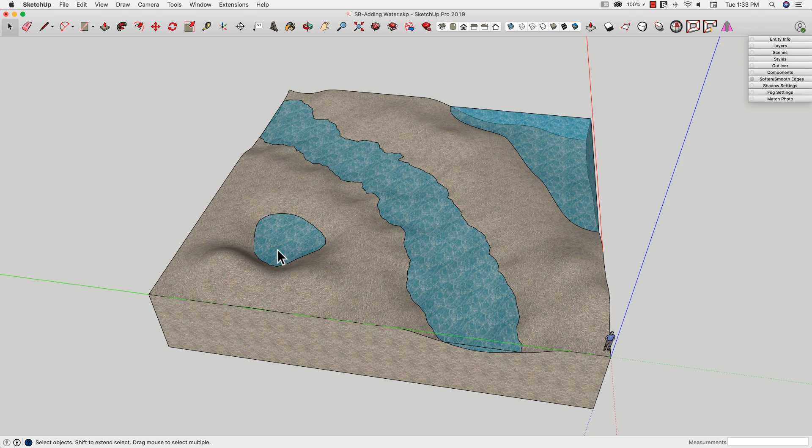Okay, so one of the first things we can do if we want this to pop a little bit more would be to get rid of these lines. If I double click on this surface, it'll select the surface and grab all the adjoining lines. If I hold down Shift, I can click on the surface, turn it off. That will give me just the boundary lines.

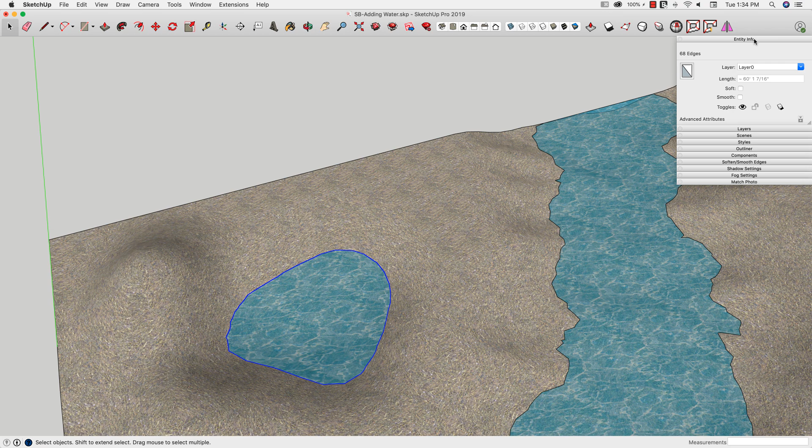Now I can come over here to Entity Info and say Soften and Smooth. What that'll do is give me the water sitting down there without the line around the edge. Not that the line's a bad thing - some people may like that look. It might actually look really good depending on the layout.

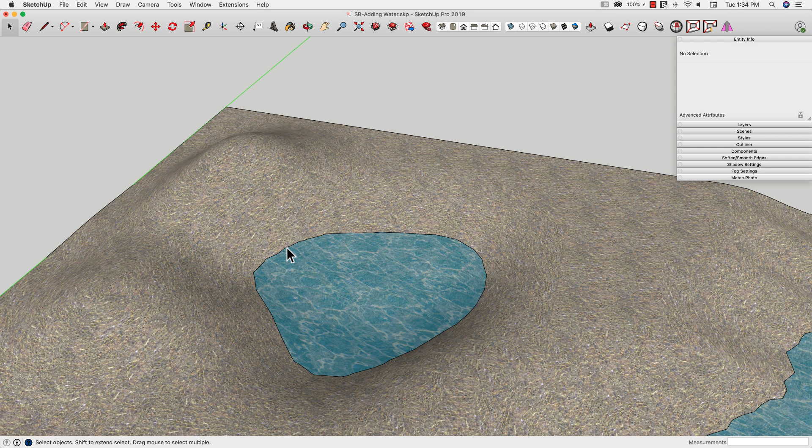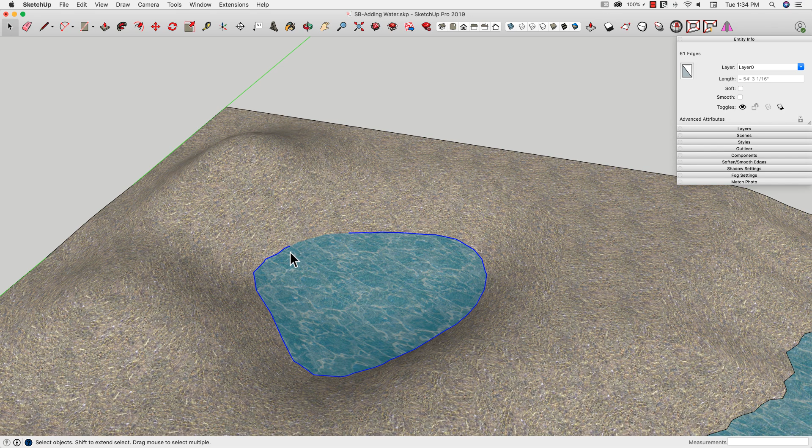But if I want to go for just a little bit more realism, or a little bit more je ne sais quoi - I don't know exactly what that means, I think it means I don't know what - but if I wanted that, I could do that by erasing it. Why don't I just grab my eraser and hold down Option or Control to hide it? I absolutely could do that too, but double clicking and then shift clicking the surface is a quicker way to get all the lines at once and allows me to just toggle invisibility.

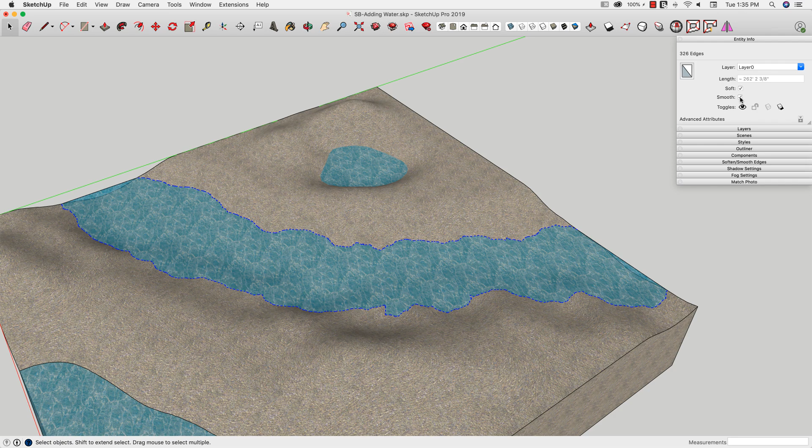I do the same thing on the creek here. The creek's a little bit different because if I do that same trick right now, I'm going to end up losing this line right here, which is kind of a boundary of my model. So I may want to hold down Shift and actually click those edge lines as well, and then soften and smooth there also. That gives me a cool creek, but I still have the hard edge of my design model - I don't know what you'd call a chunk of landscape like this. Probably a landscape chunk, that's probably the technical term.

All right, with our ocean here, this is where the ocean's coming in. I want to do something a little bit bigger than just erasing the boundary line. That's pretty simple. I want to come in and put a couple of ripples, like small waves rolling in, maybe add a little bit of a foamier color, maybe a lighter color right here on the edge, something like that. So what I want to do is take this curving line right here and offset it a few times.

First thing I do is get it selected. Right now it's a whole bunch of small segments, so I could go through the process of grabbing these lines - grab an extra one there, come in here and grab these lines. I could do this, it's a doable thing to do, it's not a bad thing. You do have to, when you get to the edges like this, make sure you turn off the extra pieces.

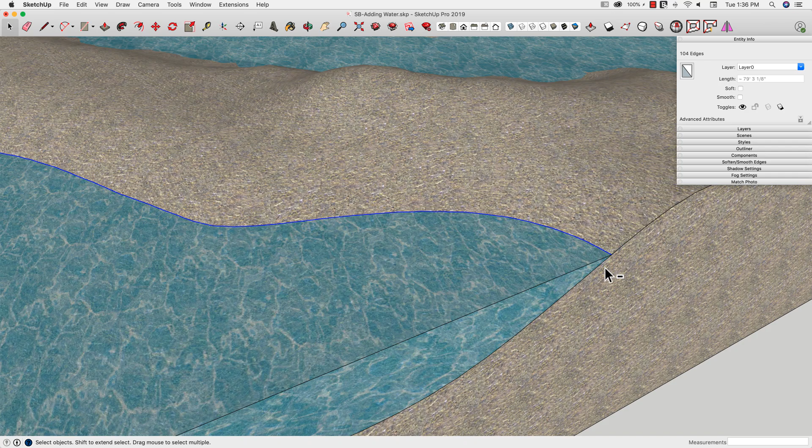Turn on my minus by holding down Shift and Option at the same time. Zoom in here. All right, so that wasn't too bad, but that's what it would take to get the - hold up, well, I'm being dramatic and making it more difficult than it needs to be, like an infomercial, but that wasn't what I did. That was honestly just selecting that. So a quicker way, of course, would be to double click the top surface, hold down Shift, remove not just the surface but then my two edges, and then I had that selected in just a couple clicks.

A lot quicker process. All right, so what I'm going to do is offset a couple times. I'm going to choose my offset tool, click this line, pull it back a little bit. And I'm going to grab it again, pull it back about here. I'm going to go about here, and do that again. I'm trying to think how many times I want to do this.

I do want to kind of get some - I don't want it perfectly even. What I'm going to do is use Move to move some of these surfaces up. So I'll have a flat section, then slope up, then slope down, then a flat section, then slope up, then down. Is that the right number? Let's see, I grab this one, and this one. Yeah, so I'm going to grab these two pieces right here.

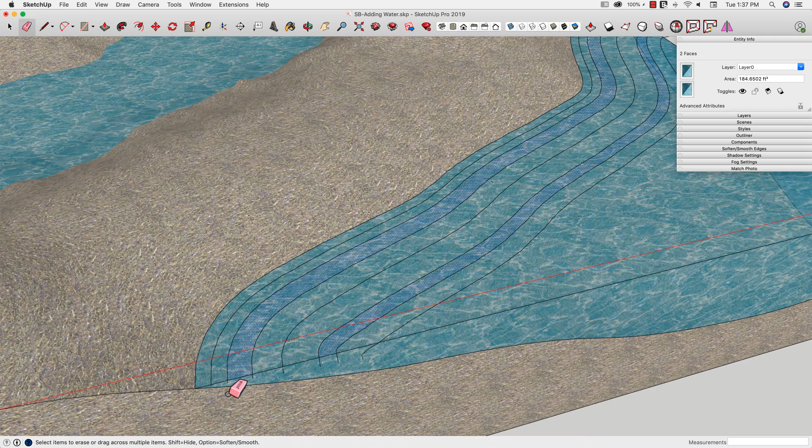Before I move these, I want to do a little bit more cleanup. I want to get rid of these extra lines that hang over the edge. I could do this at any point in the process, but I'll do it now. Any segments that lap over the edge, I can delete by dragging the eraser across them. If I get to the right view, looking from above, I can click and drag all the way down over a bunch of them. And the one out of frame, of course.

Before I start making waves, I'm going to select this first section and lighten it up just a little bit, suggesting maybe a little bit of sea foam, a lighter boundary right here. If I double click to select this material, I can change the color or the lightness of everything that is that material.

Obviously I don't want to do that because it changes all of them, so I'll hit Control Z to undo. What I want to do is take this surface, this one section, right click and make a unique texture. That adds a new color swatch clipped to that geometry. I can select just this color swatch, see the information about it, and make changes to this material to make it look like a lighter color than the rest of the model.

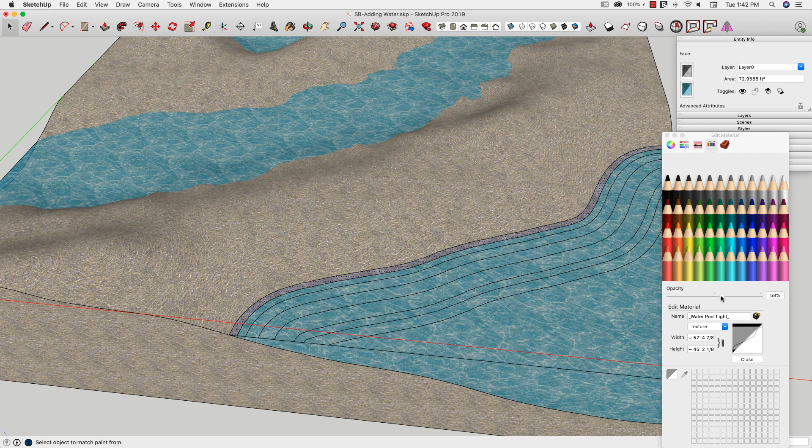I went up to 100% opacity, so I'm going to drop it back down to 60, that's where my default material is. Let's just make it pure white. I'll drop it down to white, go back to my 60% opacity, and that looks good. So it's going to a lighter shade there.

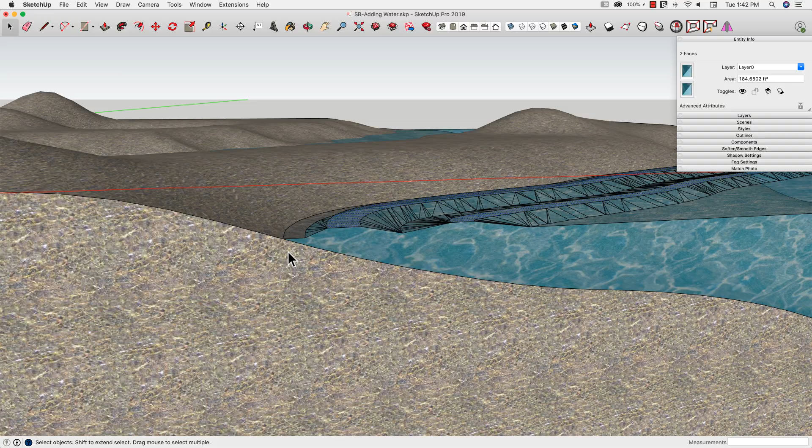Now I'm going to grab this and this section, use move, and constrain to the vertical axis by hitting the up key on my keyboard, and take these two shapes and raise them up just a little bit. Look at that, those beautiful waves. Actually, it's a terribly ugly mess, so we want to clean that up.

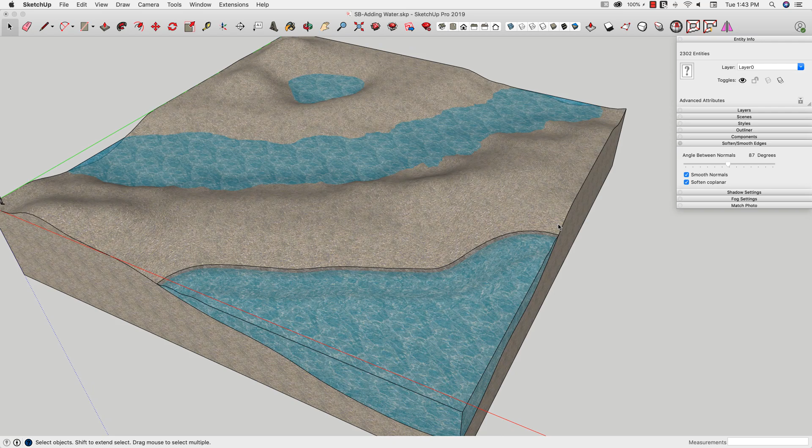I'm going to come in and do a group select of all that geometry. I got a little bit of extra, but that's okay. I'll take all of that, go to soften and smooth edges, and toggle that on. And there we go, now we've got a little bit of a ripple in the water coming up to my beach.

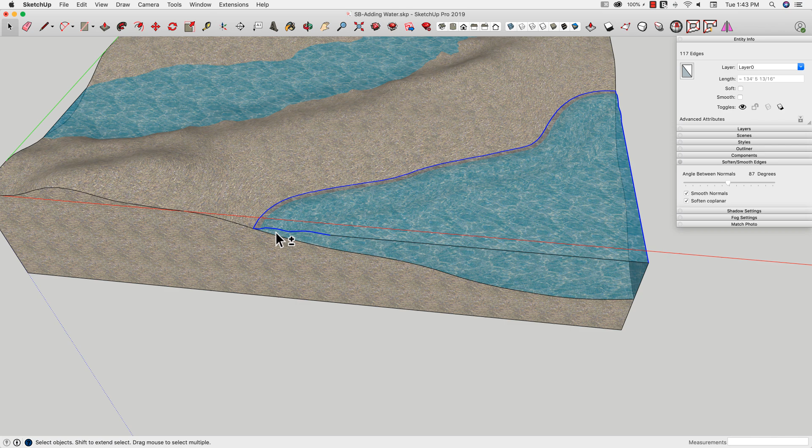I could do the same thing at this point. I want to soften this edge again, just like I did on the river and the lake. It's not as quick and easy to select this time, because if I turn off this surface, I can turn off a portion of this edge, but those edges we made created a lot of extra geometry. So here's a shortcut to turn off all of this at once.

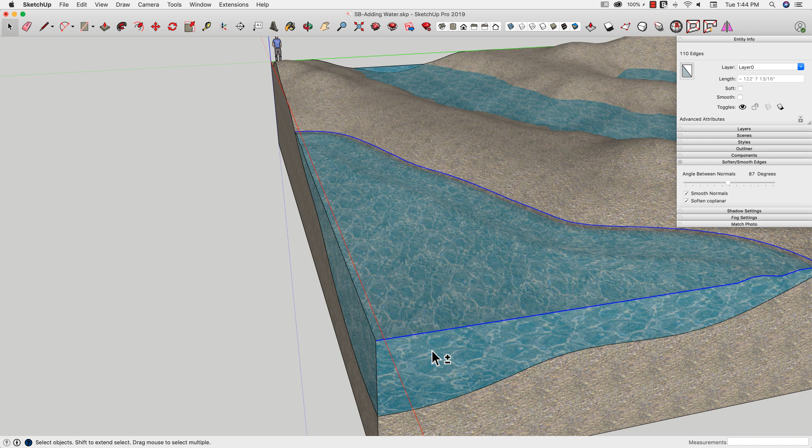I'm going to double click here - it gets my boundary that I want, plus all my other boundaries. Shift click the top, then shift click the side once, only once, and double click it. That turns off the selected surface and all adjoining edges, so I get rid of all of them at once - single click with shift held down, then double click with shift held down. Now I'm back to just this one edge, and I come up here, say soften and smooth, and there we go - now I've just got that little bleeding edge.

It looks like kind of wet sand versus my more bluey, tealy colors where my waves are rolling in to my beach.